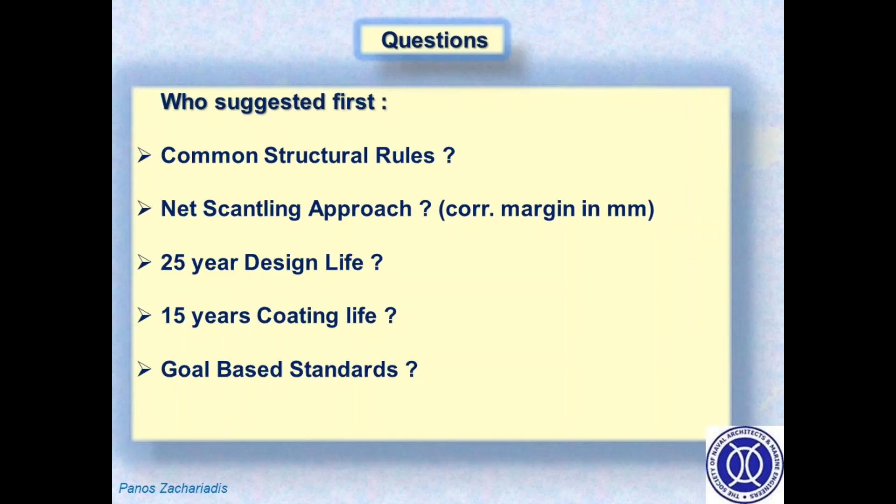So let's start with some questions. Who do you think suggested first common structural rules, net scantling approach, 25-year design life, 15 years coating life, or goal-based standards? The answer may surprise a few people. Even common structural rules were suggested by Greece.

So a short history on goal-based standards and how they started. Most people say it started with the submission of Greece and Bahamas, but there is some prior history. The reason that they started is because of deteriorating construction standards, classes competing on scantlings, which classes have admitted. They have accepted that this was a problem.

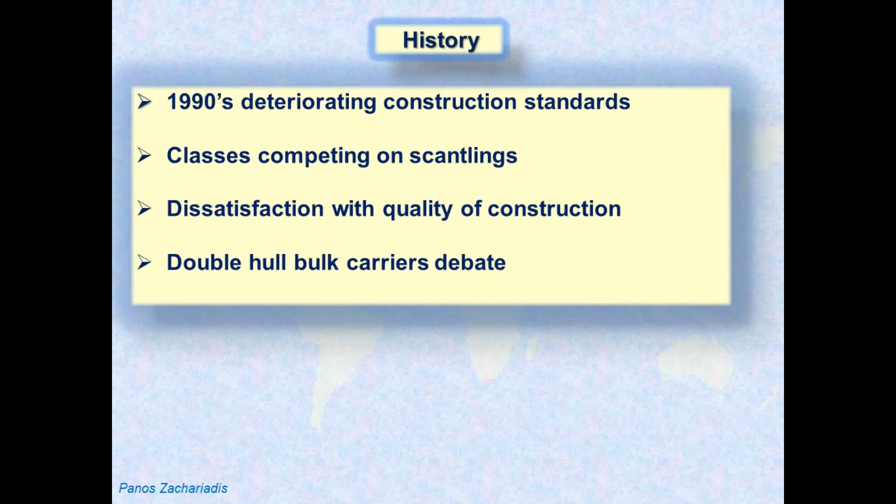Dissatisfaction with quality of construction, and there was the double hull bulk carriers debate, where at the same time there were some assessments made that double hull bulk carriers may be safer than single hull bulk carriers. And of course the Greek reaction was, this is not so. The problem is the rules and the quality of construction. So that played into the startup of goal-based standards.

So this is the paper that actually started everything. This is a paper by Greece titled Building of Robust Ships. It presents the view that IMO should ensure the building of robust bulk carriers and tankers and suggests actions to pursue. It mentions that the IMO regulates everything that has to do with the operation of the ship, but doesn't really care about the design and construction of ships.

It has some pretty harsh words. The classification society, although chosen by the owner, is paid by the shipyard, and this poses a situation of potential conflict of interest. Competition for new building orders makes it imperative to have unified standards on all aspects of ship design and construction. So this is the first motion for common rules.

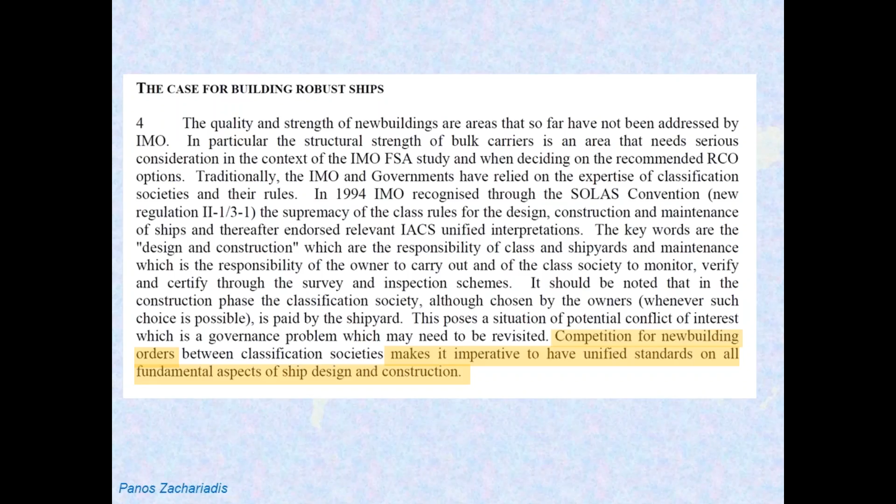The general trend in shipbuilding is optimization, which really means minimization, and that was a submission to MSC, the Maritime Safety Committee. The Maritime Safety Committee replied that IMO doesn't deal with construction standards. This is the prerogative of administrations and classification societies.

But at that time, Greece found an ally, Bahamas, and together they made a submission to the Council of IMO, which is the ruling body, suggesting that it's about time that IMO should play a role in the construction and design of ships.

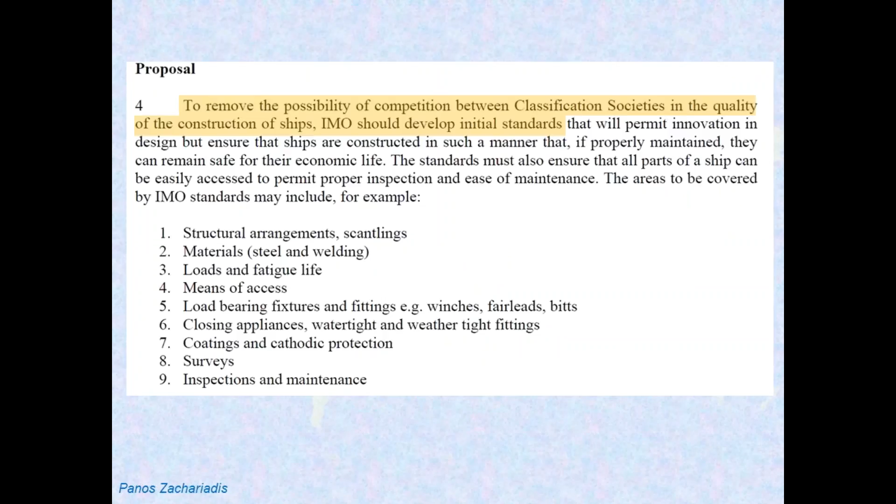And in that submission to the Council of IMO, it suggests which areas IMO should specify for the construction of ships and get involved in. It suggests that IACS should develop and implement unified standards. Coating standards should have a 15-year expected life. This is long before PSPC.

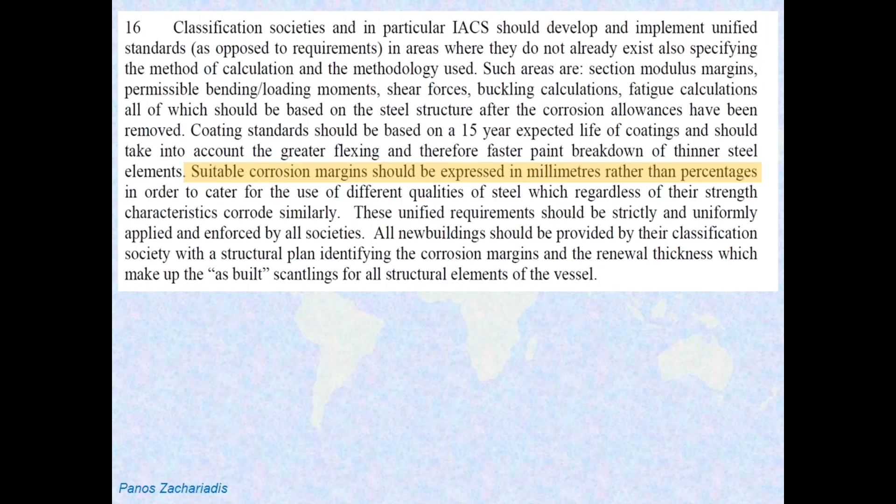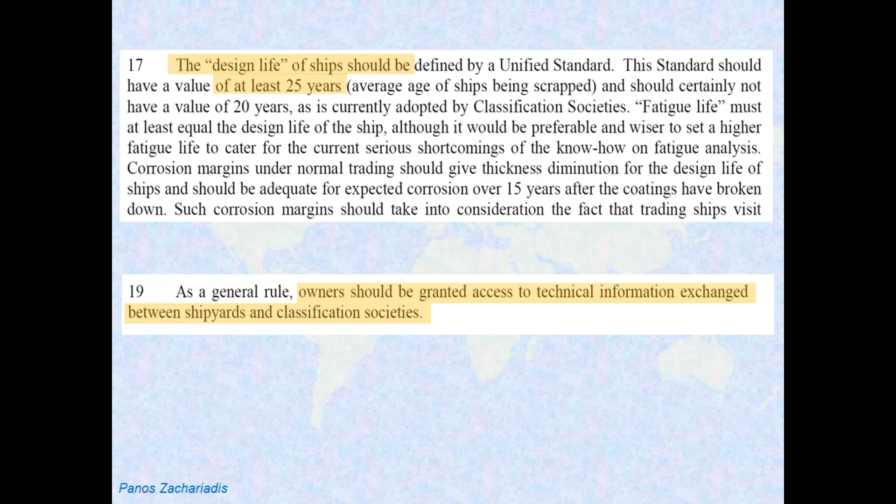And that suitable corrosion margins should be expressed in millimeters rather than percentages, the net scantling approach. The design life should be 25 years. Owners should be granted access to technical exchange between shipyards and classification societies. Of course, the Council finally agreed to it and sent it back to MSC, and they said, yes, we agree to it. IMO should be involved in the construction of ships and the rules, and therefore back to MSC, so MSC can now fix the details of this new item.

And of course, like I say, if you can't beat them, join them. IACS came along. Of course, for something like that, whether you like it or not, you need IACS. You need the expertise of IACS if you're going to make the rules for rules. And of course, IACS also liked to be involved, so they can influence the outcome. So the attitude until that point was, don't get involved in our regulations. Tell us what you want to do, tell us what your goal is, and let us do it because we know best. Well, now IMO gets involved.

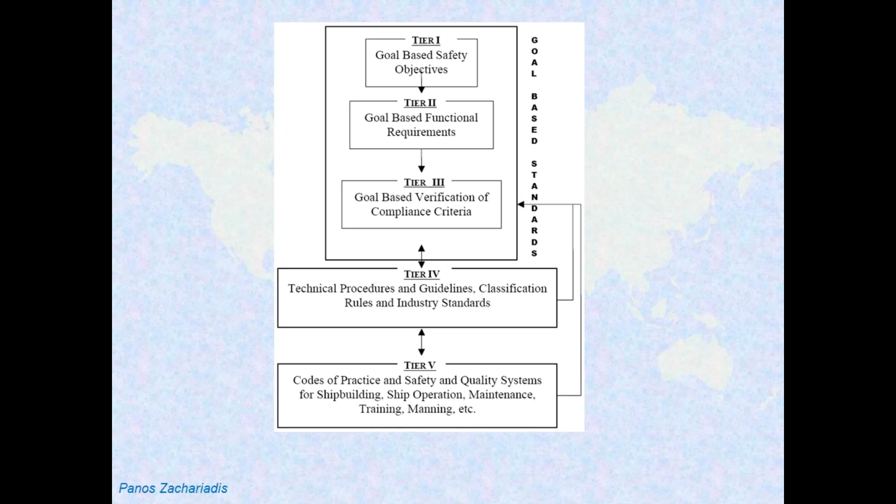And in that proposal, this is the familiar goal-based standards 5-tier diagram. The first 3 tiers are the prerogative of IMO. Tier 4 is the actual rules of classification societies. Tier 5 is non-mandatory guidelines and so on. So MSC obviously develops a working group and sends the issue to the working group to deal with the details. And soon the first problem started.

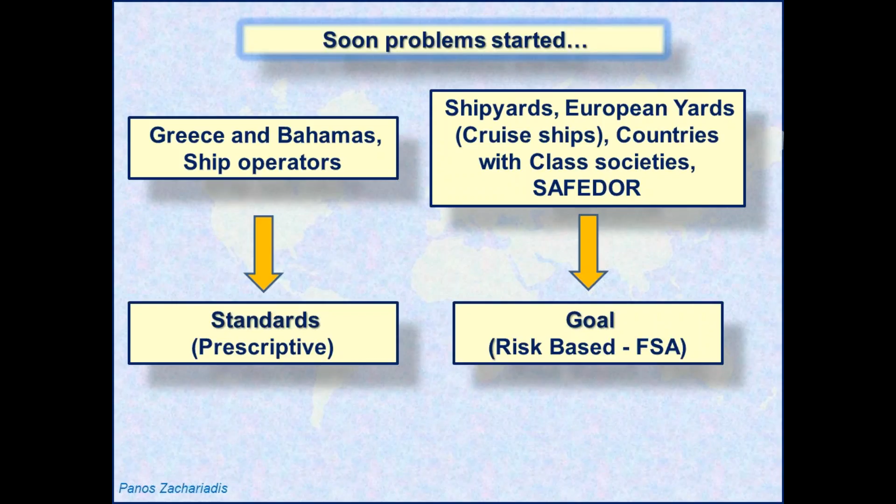Greece, Bahamas, and the ship operators in general, from the goal-based standards, had in mind the standards part of the word. They wanted prescriptive, strict regulations. Shipyards, the European shipyards who deal with cruise ships, like flexibility, innovation, and so on. IACS and SAFEDOR, which was a big consortium of European countries dealing with risk issues and risk design, had mostly in mind the goal part of the phrase. In other words, that goal-based standards should be based on a safety level approach, FSA, formal safety assessment.

So this debate went on for 2 years, and IMO was pretty much stuck until finally it was decided that both will proceed, both the risk-based approach and Greece's prescriptive approach. The prescriptive approach will be applicable only to tankers and bulk carriers for the time being. And of course, the safety level approach needed a lot more time in order to be finalized. So it was something for the future anyway.

Now, on the prescriptive approach, soon enough, 2 versions of Tier 2, of functional requirements that need to be complied with by the rules, were created. One was the Greek version, the other one was the Japanese version. Now, as we understand, the Greek version was very prescriptive, very strict. We tried to include everything that we need the rules to comply with. The Japanese version was milder. Obviously, they wanted less regulation, more flexibility for them.

So that took up another good 1.5 years or maybe more until somebody had an idea to convince Spain to produce a compromise version. Now, Spain produced a compromise version of Tier 2, and I think this had a big role to play because Spain, because of the Prestige, in a way was for stricter rules. So the end result, I can say I liked, because the Spanish version was much closer to the Greek version than the Japanese version.

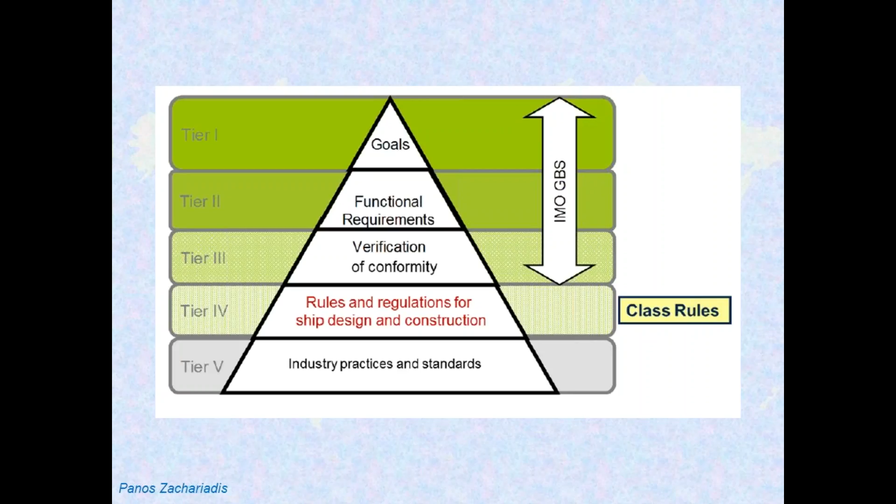But for me, the heart of goal-based standards is the verification of conformity, because in there you have all the details of what exactly the rules should include in order to comply with Tier 2 and Tier 1. This is the functional requirements finally that were set up for Tier 2, 15 functional requirements. Design life, what the design life of the ship should be, what environmental conditions should be used for the design, and so on.

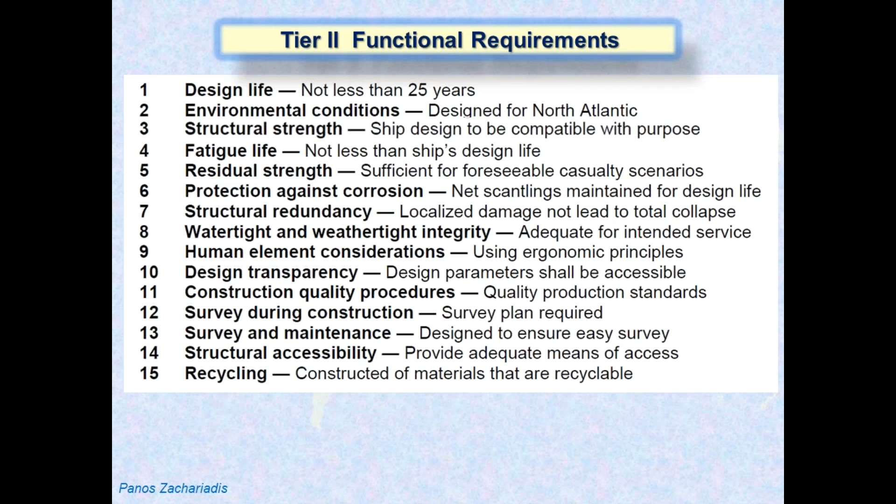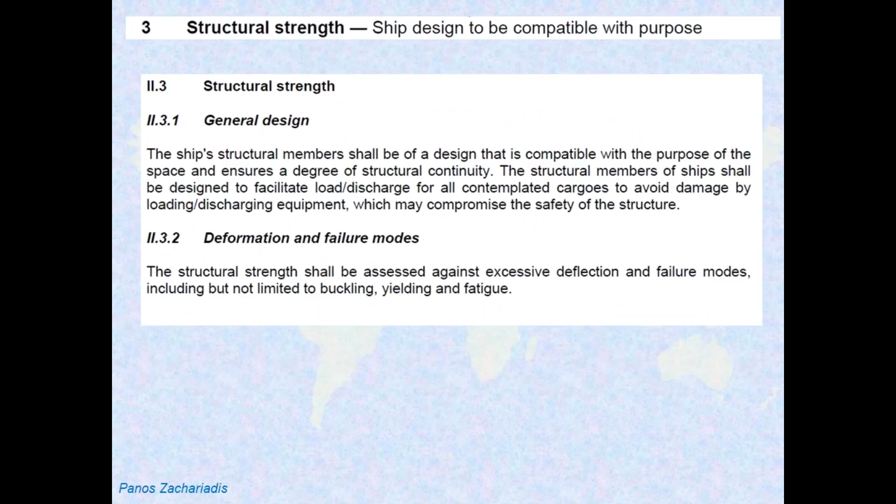Let's take an example of structural strength. This is the actual text of Tier 2 for structural strength, the general paragraph, and then it goes on to say that the structural strength shall be assessed against excessive deflection and failure modes, including buckling, yielding, and fatigue, and it should take into account ultimate strength, and it should have sufficient safety margins. That's all there is to it as far as structural strength for Tier 2.

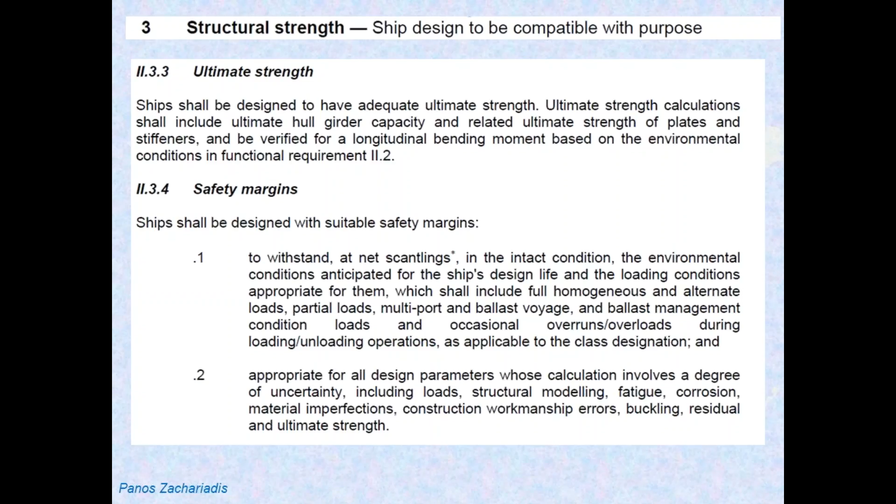The verification part, however, the Tier 3, is much more detailed. It requests from the authors of the rules to produce to the auditors of IMO, so they can verify whether the rules comply with the standards, 2 things: documents and information, and evaluation criteria. The documents look something like this: information and documentation requirements.

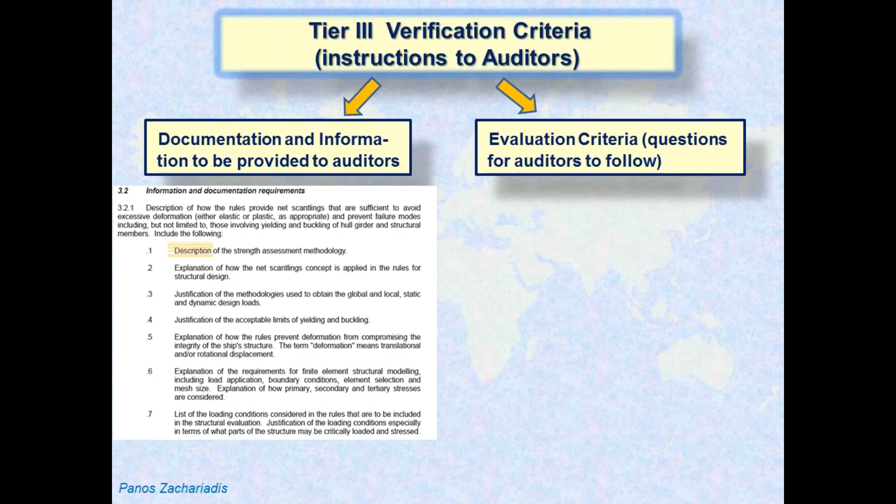Give us the description of how you do the strength assessment. Give us an explanation of the net scantling concept you are using. Give us justification of the methodologies you use to obtain the global loads and all that. So this is information that the auditors request from the classification rules. By the way, 25 such items are required in Tier 3 only for the structural strength.

Once they get the information, then Tier 3 guides the auditors on how to do the audit. And it tells them, you have to ask yourself the following questions. If the answer is yes, it's okay. If the answer is no, it's a problem.

So, for the structural strength, do the rules specify the probability of exceedance for which global and local dynamic loads are calculated? Are the limits of yielding and so on set at levels that will maintain the structural integrity? Do the rules sufficiently contain information and so on? Questions for the auditors to answer during the audit. 23 specific and detailed questions for the structural strength.

Now, you can imagine, this is one item. We have 15 Tier 2 functional requirements. This is just an example I'm giving for structural strength. Each one of them has such detailed requirements for information to be provided and documentation and specific evaluation criteria.

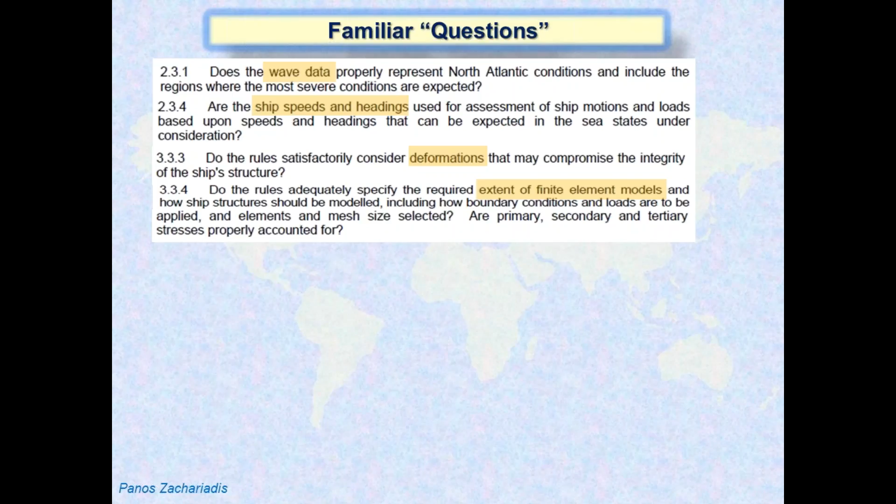So, some familiar questions, questions that I picked up as examples that are included in the evaluation criteria of Tier 3. Does the wave data properly represent the North Atlantic? Do the rules satisfactorily consider deformations? What is the extent of finite element models? You see how detailed the questions are.

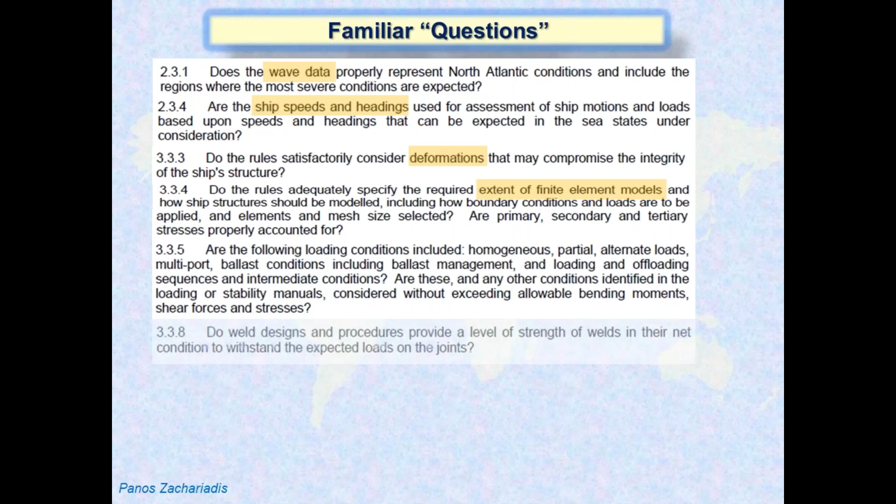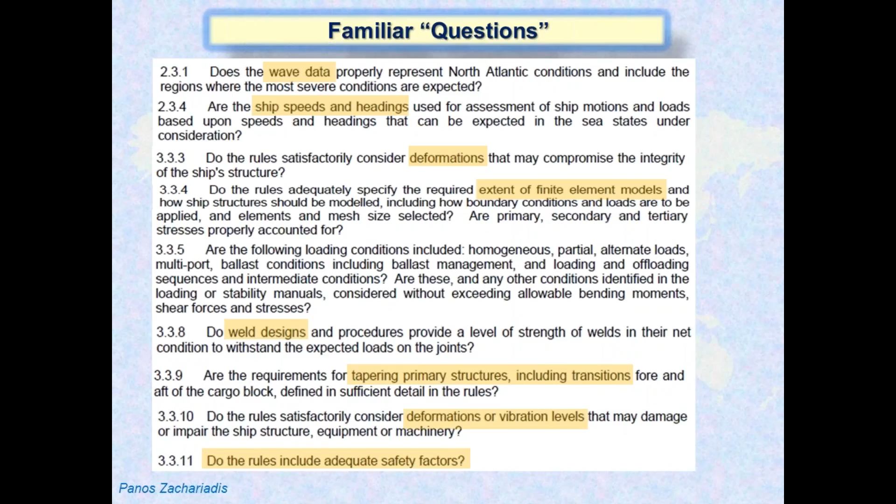Are the following loading conditions included? Homogeneous, partial, alternate, multi-port, ballast, ballast management, loading and offloading sequences, and intermediate conditions. All those are requirements for the rules to include and comply. Weld considerations, tapering, transitions, deformation, vibrations. Do the rules include adequate safety factors? If you use stress concentration factors, how did you come up with them? Okay, I'll go a little fast, but you can see the level of detail Tier 3 goes into.

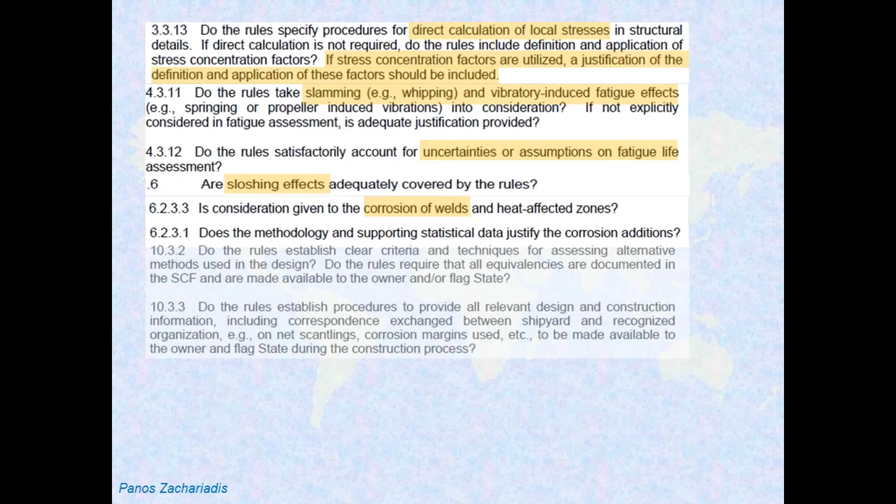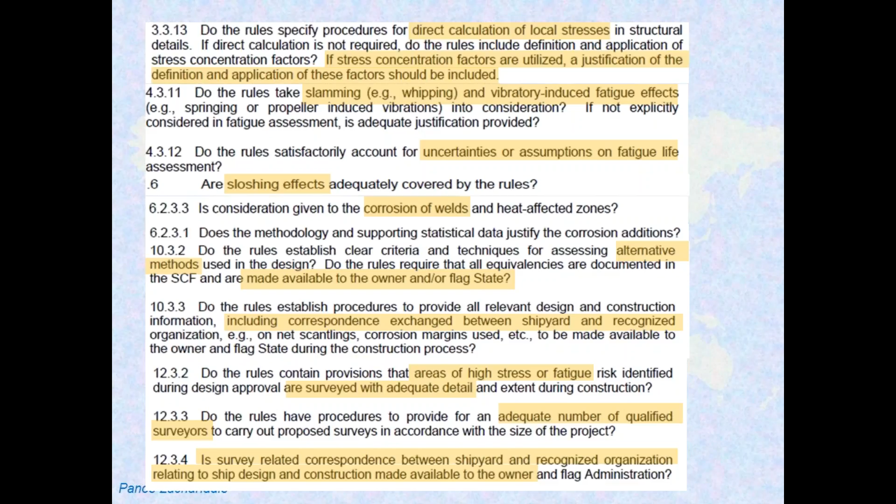And of course, most of these were developed during the pilot project. I didn't take part, but there were some people who were part of the pilot group, Mr. Andreopoulos and other experts, actually not from classification societies. Classification societies were on the other part, professors from universities and all that. And they did a real good job in actually coming up with good criteria for rules.

So that was the goal-based standards part. This is what the goal-based standards are. And now we go into the common structural rules. This is the latest version, harmonized for tankers and bulk carriers. These are the rules that were submitted to IMO so they can go through the audit to decide whether the rules comply with all the standards or not.

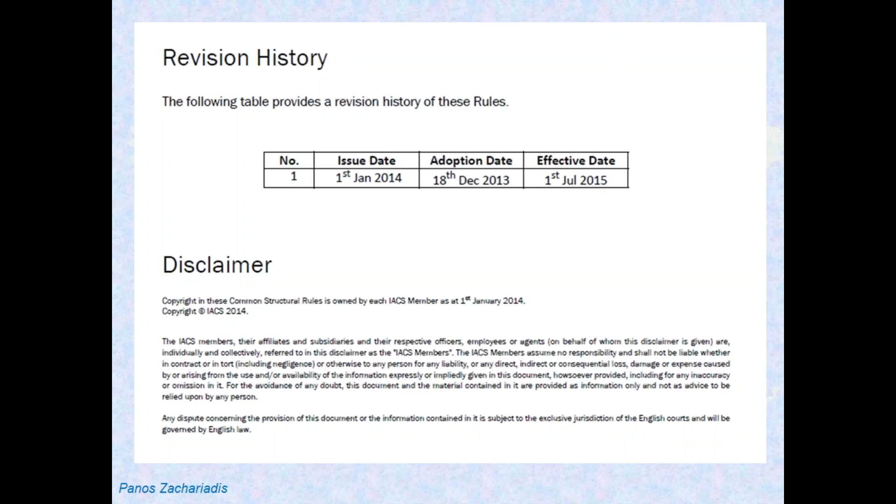The rule, of course, is thousands of pages if you include the URs and the UIs and all that. And this is the first page of the rules. The first page of the rules has a disclaimer and says, IACS members assume no responsibility and shall not be liable for anything arising from the use of this information. For the avoidance of any doubt, this document and the material contained in it are provided as information only and not as advice to be relied upon by any person. Now, this is on the rule book.

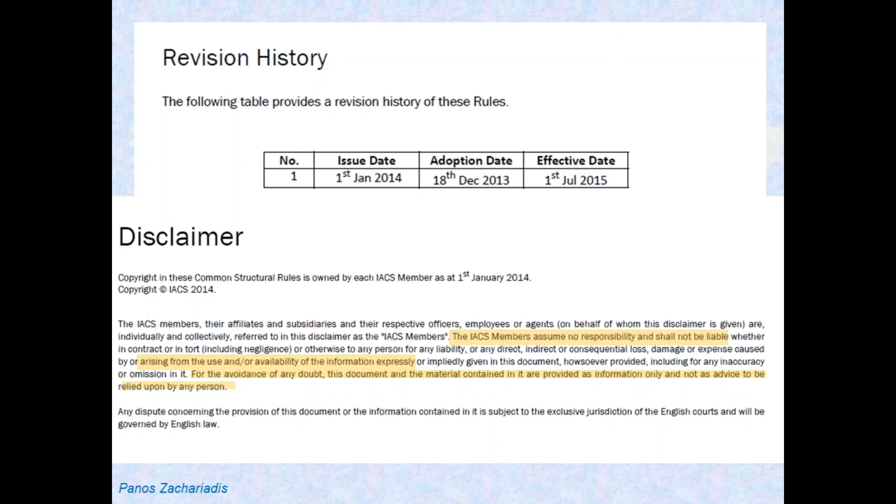Now, on the IACS site, it's a little different. It says, unless that person has signed a contract with the relevant IACS member, and then the liability would be as per terms of that contract. Now, of course, owners don't sign contracts for the construction of the ship. Shipyards do. I don't know if shipyards involve any responsibility. I would doubt it. But this is an issue that never stood well with me. You give rules, you build ships, and then you have this kind of disclaimers.

So IACS submitted two big packages, Common Package 1 and Common Package 2, which one is the CSR harmonized rules, and the other one is all the related documents that IACS uses in conjunction with the rules, unified requirements, procedural requirements, unified interpretations, etc. And also every classification society has its own rules that are not already covered by the other two documents. And all that was submitted to IMO for audit.

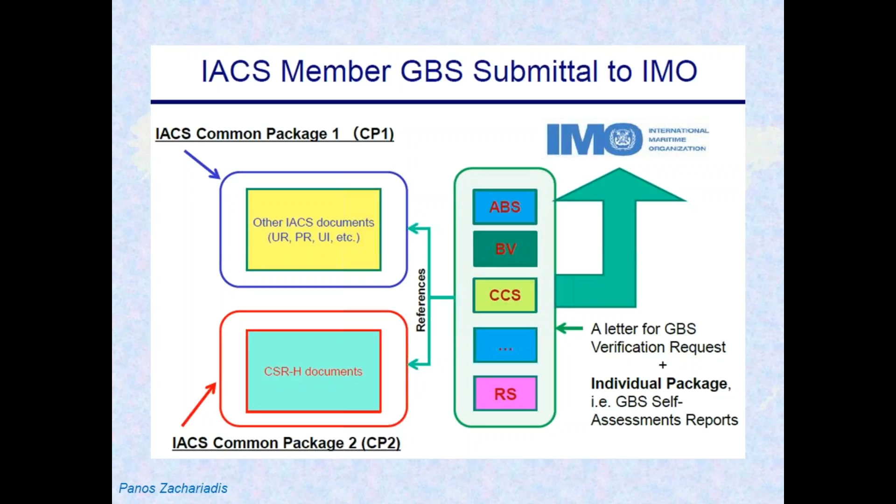And IMO produced 5 teams of auditors, 17 auditors in total. But the bulk of the work, of course, was Team 1 and Team 5. Those were the 2 teams that actually checked the common structural rules, the harmonized version. Teams 2, 3, and 4 checked only the individual rules. In other words, the areas in each IACS member's rules that are not already included in the common packages.

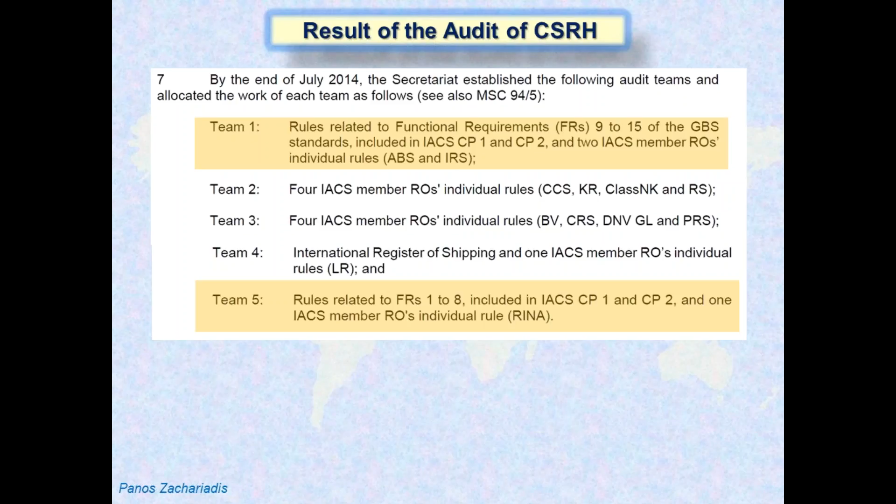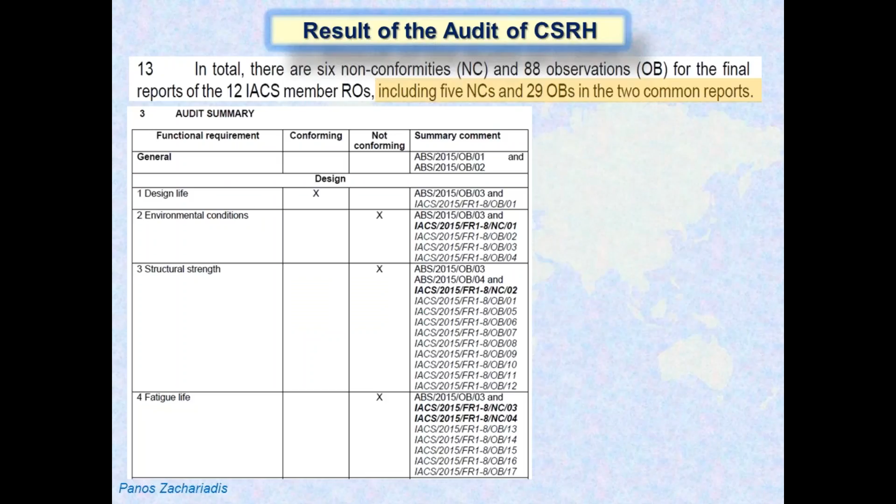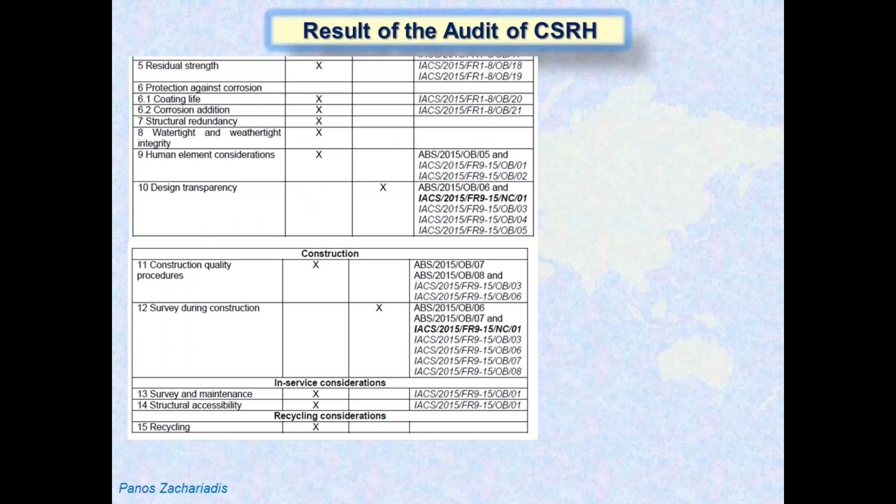This is a summary of the result of the audit. As you can see, not conforming was environmental conditions, structural strength, fatigue life, because except for many observations that were produced by the auditors, for these areas there were also clear non-conformities. Also design transparency was a problem, and survey during construction was a problem. And we'll go into more detail into that. That's an example of how the findings by the auditors look like.

This is the first non-conformity, it has to do with IACS Recommendation 34, which is the North Atlantic wave data that IACS uses for the design of ships. In there, IACS assumes equal heading probability for the ships, no matter what the weather and the waves. And of course, this was found to be a non-conformity because, as we know, head seas always should have higher probability of occurrence because the masters, even in bad weather, prefer to have the bad weather at the bow.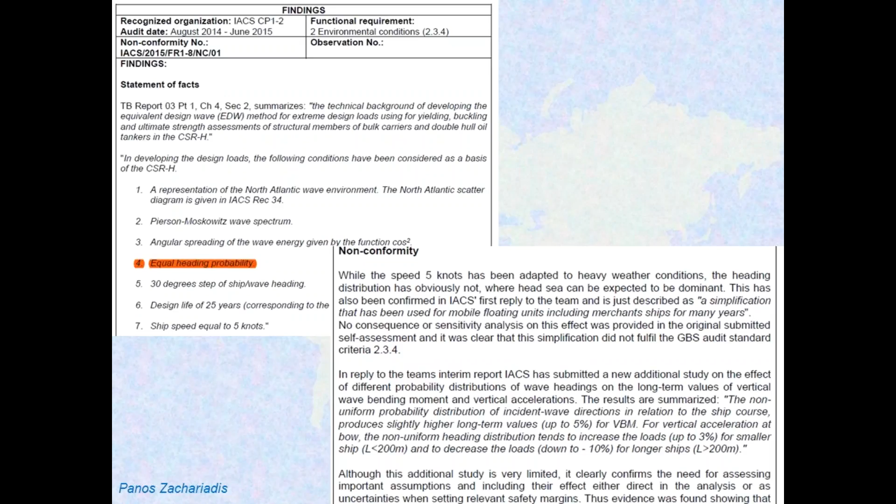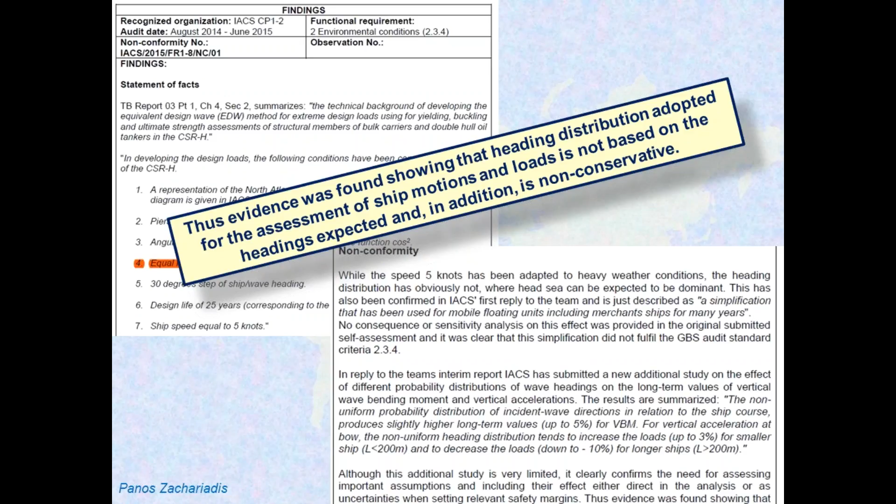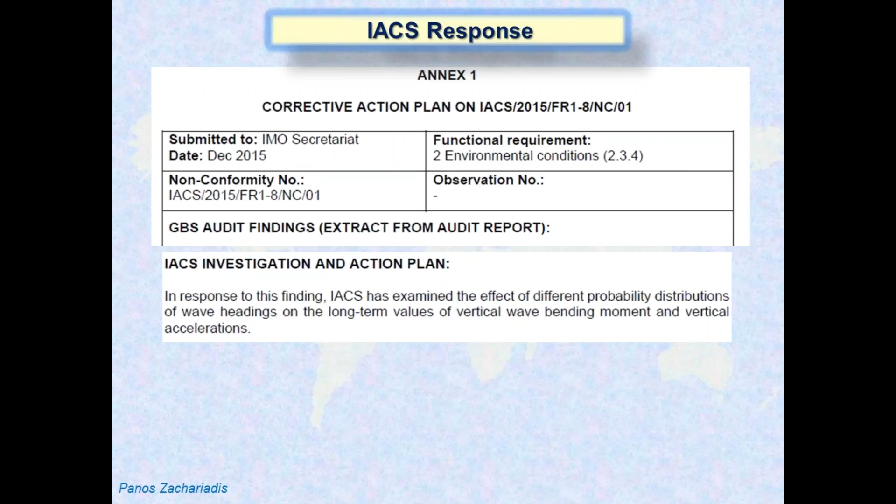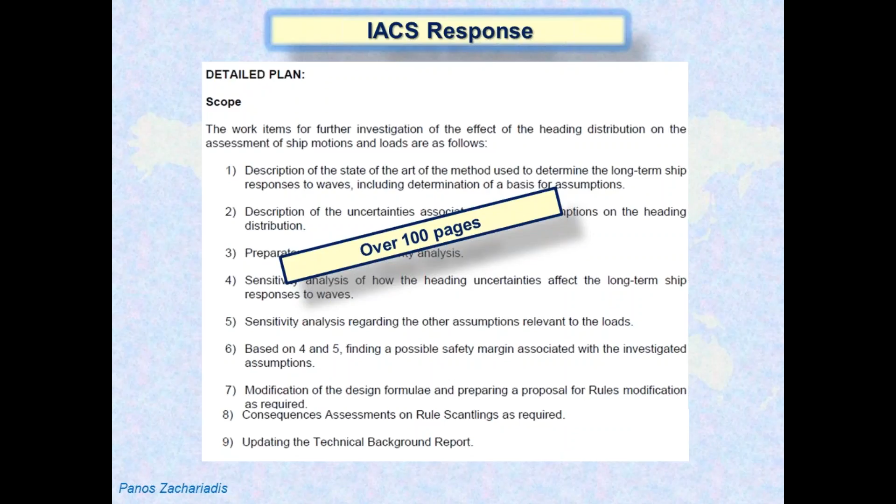So this is the conclusion from the auditors. Evidence was found showing that the heading distribution adopted for the assessment of ship motions and loads is not based on the headings expected, and in addition, is not conservative. To these findings, IACS makes a response by proposing corrective actions. This is how it looks in this specific case. IACS says, I'm going to do 1, 2, 3, 4, 5, 6 in order to comply with this non-conformity. The IACS document, as a response to the auditor's findings, is over 100 pages.

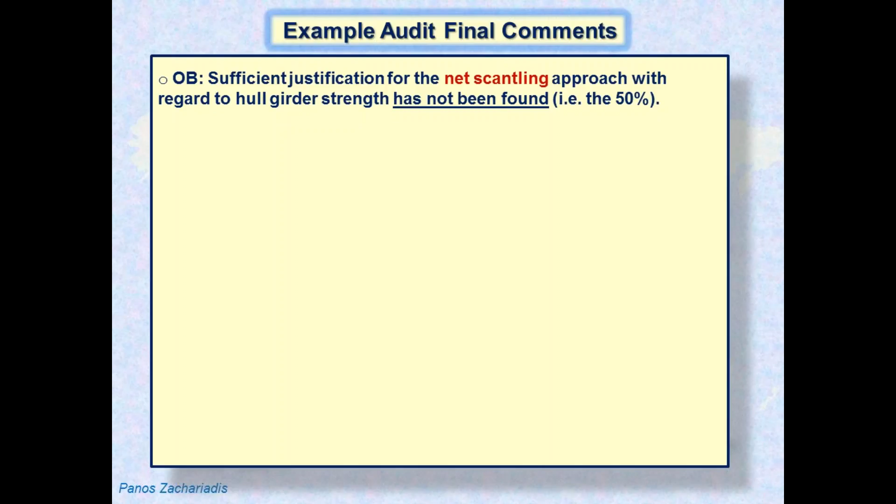I want to give you now some example audit comments. Observation: sufficient justification for the net scantling approach has not been found. In other words, how did you come up with a 50% corrosion addition to the net scantlings? The audit has not found sufficient justification that the wave data used in the rules properly represent the North Atlantic. We all know it's old data. There are a lot of new studies saying it's more severe and all that.

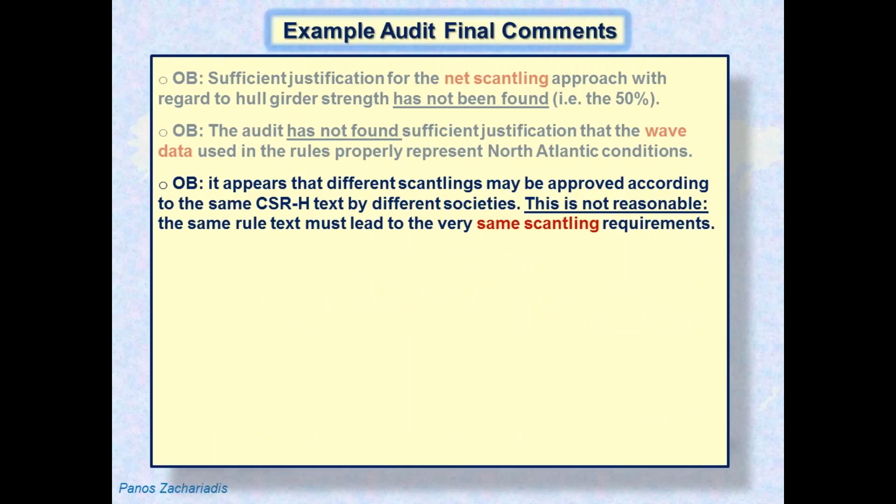Different scantlings will be produced by the same rules. This is something, of course, we've been saying a long time ago, and that's because of the software. If you don't have common software, you're not going to get the same scantlings. Notice that so far all these are simple observations. Okay? They are not non-conformities, but to me, most of the observations were actually non-conformities.

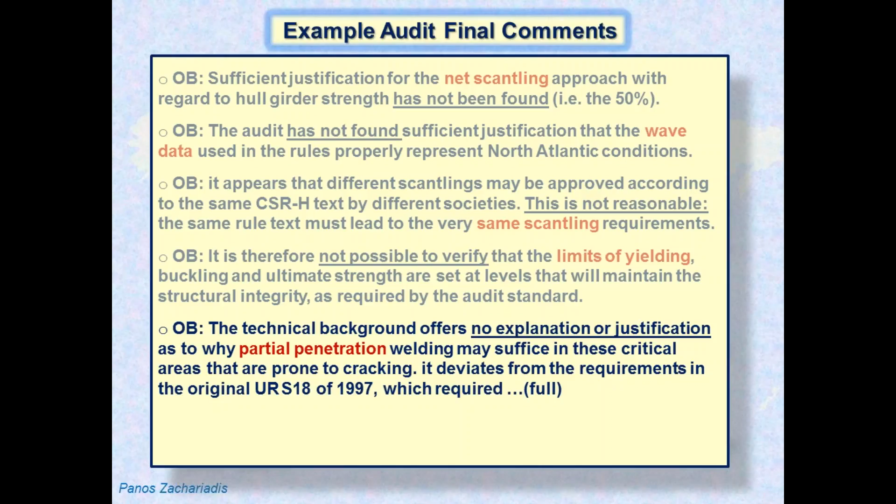Not possible to verify that the limits of yielding, buckling, and all that are set at appropriate levels. The technical background offers no explanation as to why partial penetration welding may suffice in these critical areas. Something that we've also been saying at the UTS time and time again. This is a non-conformity: there's no evidence to conclude that the rules include adequate safety factors.

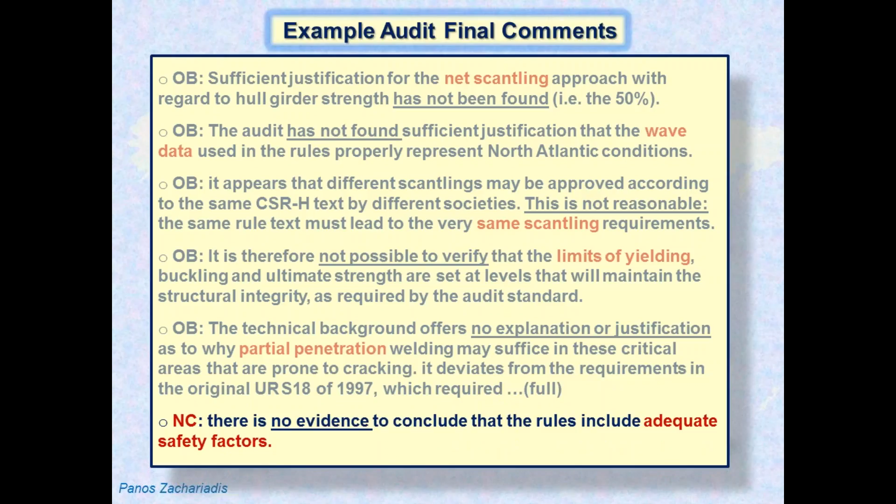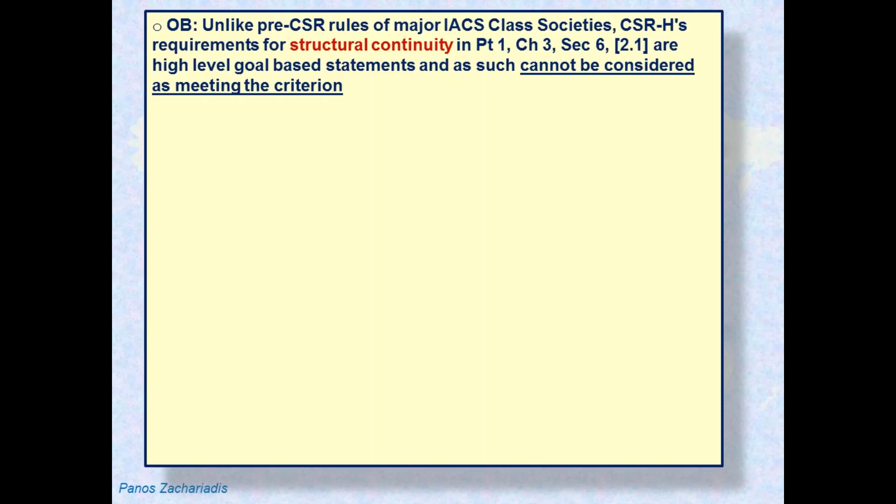Sounds serious, I guess. That's another little embarrassing statement, I would think, for IACS. It says, unlike pre-CSR rules, in other words, the pre-CSR rules have it, requirements for structural continuity are in these rules high-level goal-based statements and cannot be considered as meeting the criteria. In other words, clearly the auditors think this is a downgrade of these rules.

As far as the safety margins, many times IACS has claimed that designing for North Atlantic conditions is safety margin enough, because not all ships, and mostly existing ships, don't always operate in the North Atlantic. And of course, this is something that I don't agree with, and the auditors don't agree with. Goal-based standards say we design for North Atlantic, period, and also they make ships that are always operating in the North Atlantic, so they have to be safe too.

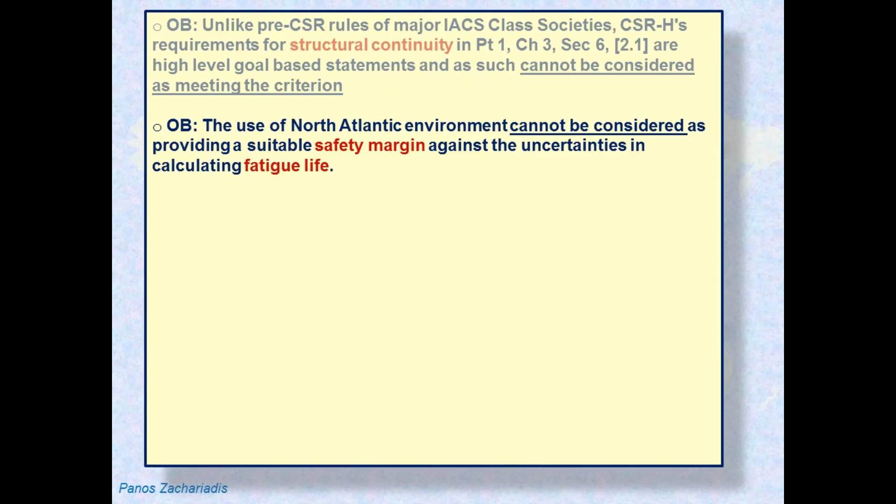The assumed loading conditions, this is for fatigue, appear unrepresentative. IACS assumed that the ship is loaded 70% of the time, 15% of the time is in heavy ballast condition, and 15% of the time is in light ballast condition. And of course, the auditors said the North Atlantic will never operate in light ballast condition. So heavy ballast being, as John Botarakis well knows, the most punitive fatigue condition, it was pretty much reduced by considering that half of the time in ballast condition would be light ballast condition. And that's a non-conformity, by the way.

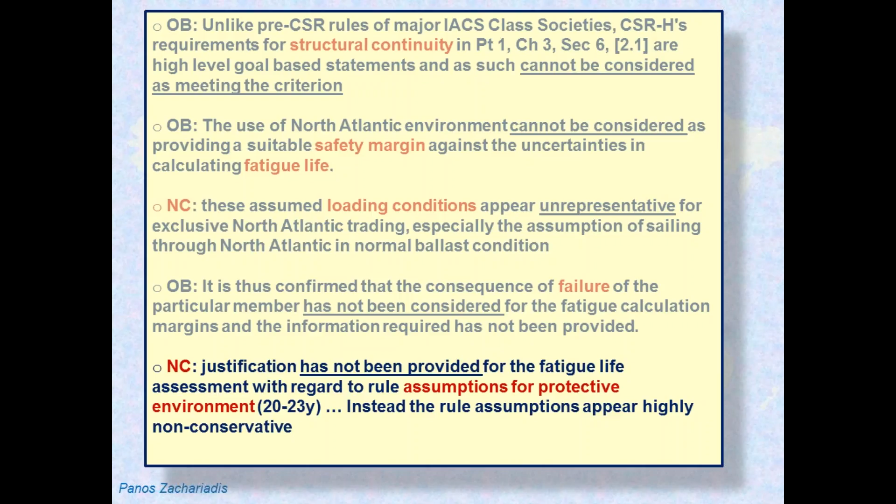The consequence of failure of a particular member has not been considered in the fatigue calculation. Non-conformity, no justification with regard to the rule assumptions for protective environment. This is again for fatigue. In fatigue assessment, IACS and the rules assume that the steel is protected for 20 to 23 years. In other words, it remains coated. And we're talking about welds and all that. As you understand, without maintenance and repairs, this is not possible. And we're talking also about void spaces where PSPC is not valid to begin with. So this is clearly a non-conformity and an unrealistic assumption that, according to the auditor, needs to be revised.

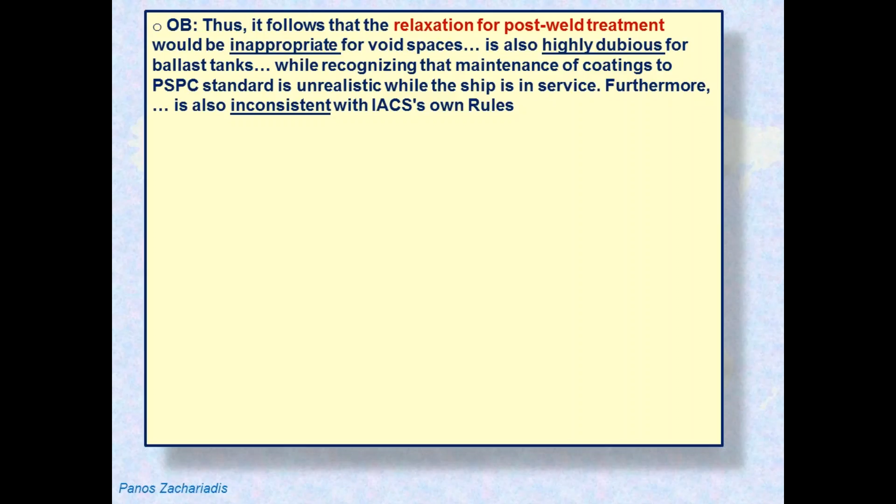Post-weld treatment, another hot potato. If you do grinding, you can reduce the required fatigue life of a detail. In other words, you can assume that 17 years of fatigue is equivalent to 25 years as the rule requires if you do grinding. And of course, again, this may be inside tanks, inside void spaces, and so on. And we know the reality of ships, this is not really possible. So the auditors ask that this is taken back.

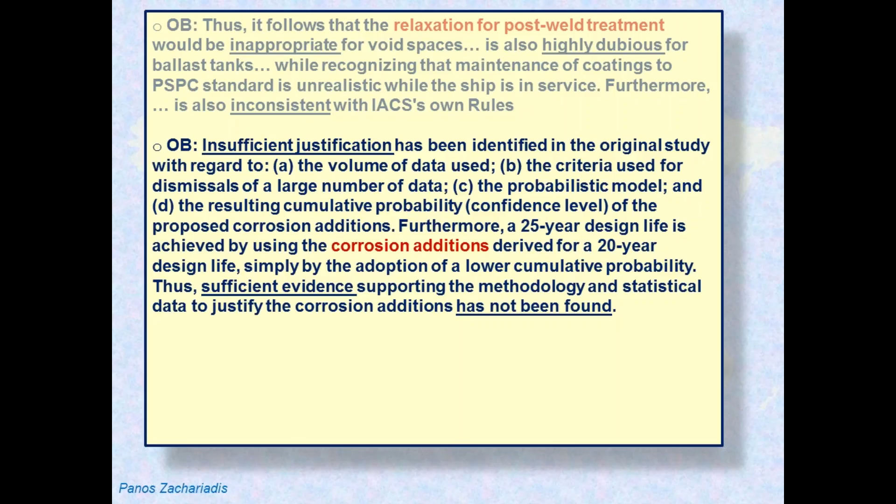Corrosion additions, my favorite subject. Practically, the auditors question the whole methodology of the IACS method of producing the corrosion additions. They say insufficient justification for the volume of data, criteria used, the probabilistic model, cumulative probability, and so on. Not enough evidence that alternative methods to the rule are assessed properly.

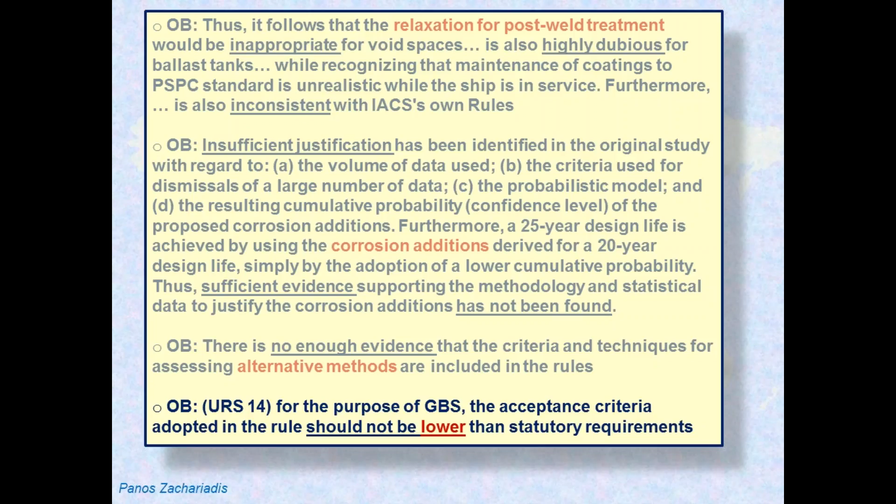And finally, another hot issue lately, UR S14, this is the testing of tanks of watertight spaces. IACS was using a version of UR S14 that's not in accordance with SOLAS. And here, the auditors reprimand IACS saying you should never use anything lower than SOLAS in your rules.

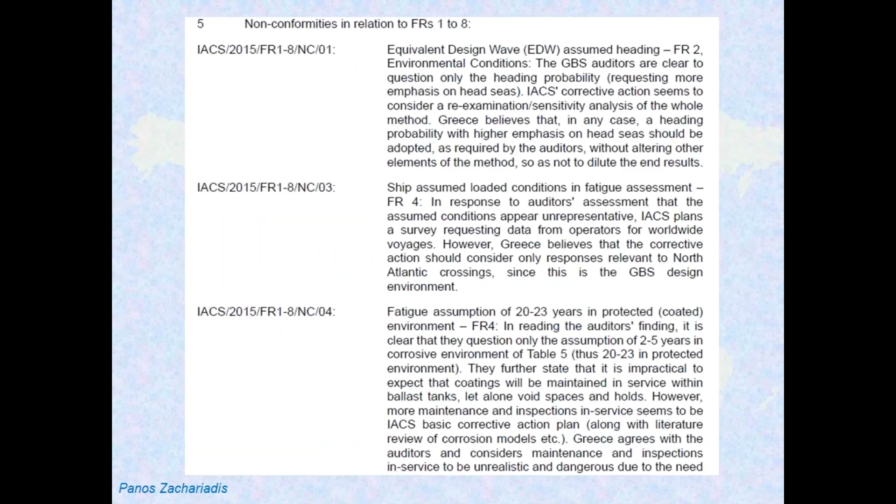So far we have the audit report, the reply by IACS on how they plan their corrective actions, how they plan to proceed. And only Greece submitted some comments to this MSC that's coming up in May, saying in general that we agree with the IACS proposed action plan, except for a few areas that we don't agree, and IACS should do it differently. This is a tabulation of really what Greece is commenting on. I don't know how much time we should spend. Let me see.

Let's take the first example that we discussed, the heading. The auditors say change the heading probability and make it so that head seas have higher probability than anything else in your assessment. In their corrective actions that IACS submitted to IMO, it seems that they propose to revise the whole method, not just the heading probability. So the Greek comment was, don't really address the whole method. Just change the heading probability and nothing else. Because by redoing the whole method, you can change the heading probability, but then you can change other things, so we don't know the net result.

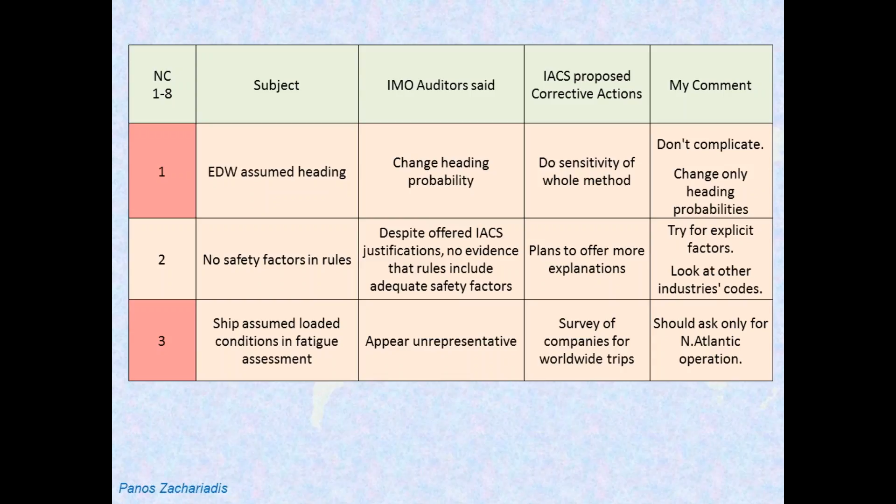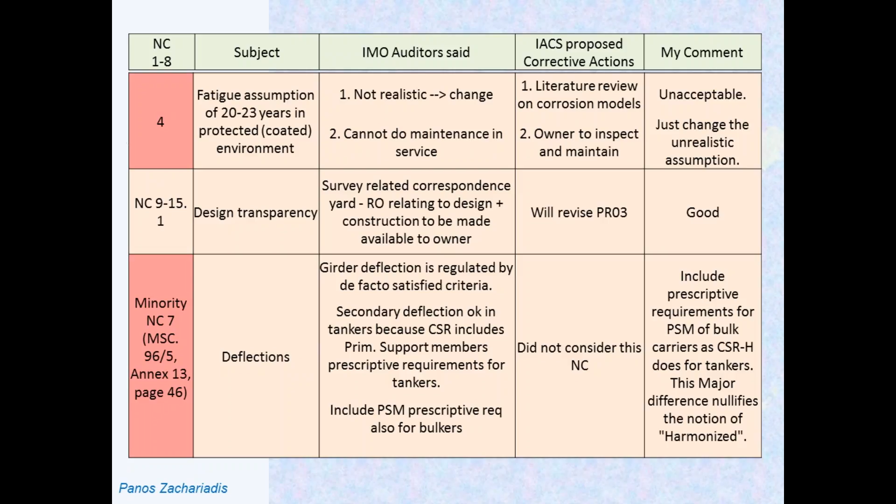So I'm sure you can see this later. The fatigue that we discussed before on the protected coated environment. And now we move to observations, full or partial penetration.

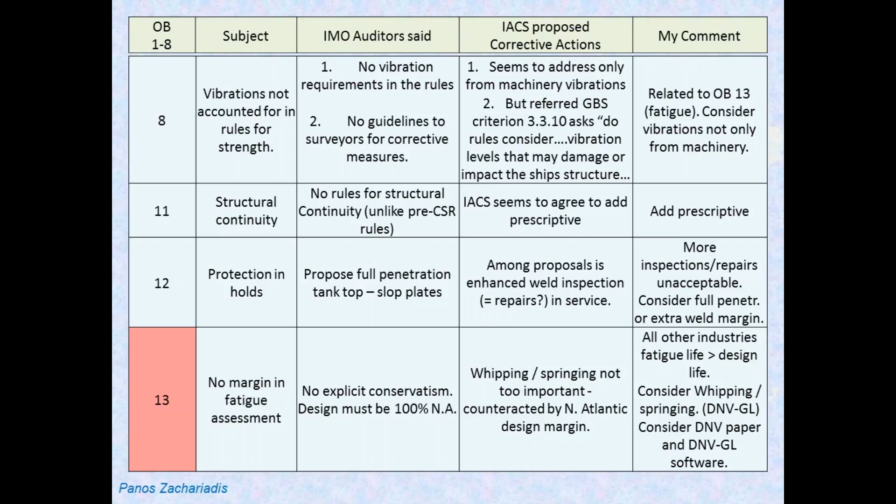No margin of fatigue assessment, and so on. If you want to revisit those in more detail, we can discuss it later.

In some areas, Greece did not agree with IACS for some good reason. For example, let's take the 17, fatigue ready for grinding. If the shipyard does grinding, then they can satisfy only 17 years of life for the detail. But this detail has to remain protected, coated for the life of the ship. So the auditor says, this is an unrealistic assumption, take it back. In other words, require 25 years of fatigue for all details.

In their corrective actions, IACS says, we will develop an inspection procedure for the ships in service. In other words, it seems to me, pass the buck to the operator. Instead of saying, forget about this relaxation in the construction rules, we'll keep it, and then we'll demand from the owner that every month or every 6 months, he goes into the void spaces and the ballast tanks to make sure that the welds are in code. Of course, as you understand, this is not feasible, and of course, it's unacceptable.

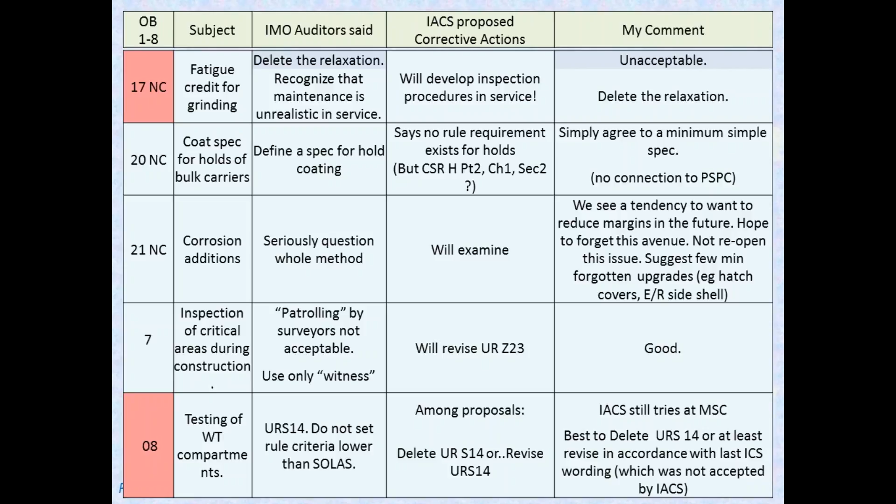So those were the interventions that are included in the Greek submission now to IMO. And hopefully there will be agreement not only by the other member states, but also by IACS to fix those things. Some conclusions. A lot of serious work has been done on goal-based standards to become a real good tool for the assessment of rules. The auditors did a very good job. They went deeply into the rules.

So, to me, the majority of the observations are actually non-conformities. In other words, you have the verification criterion that's clearly not satisfied, but then you only make an observation and not a non-conformity. But in any case, if all non-conformities and observations are properly addressed, the rules will be greatly improved. But of course, there are still quite a few things to fix in the rules. We should continue the effort.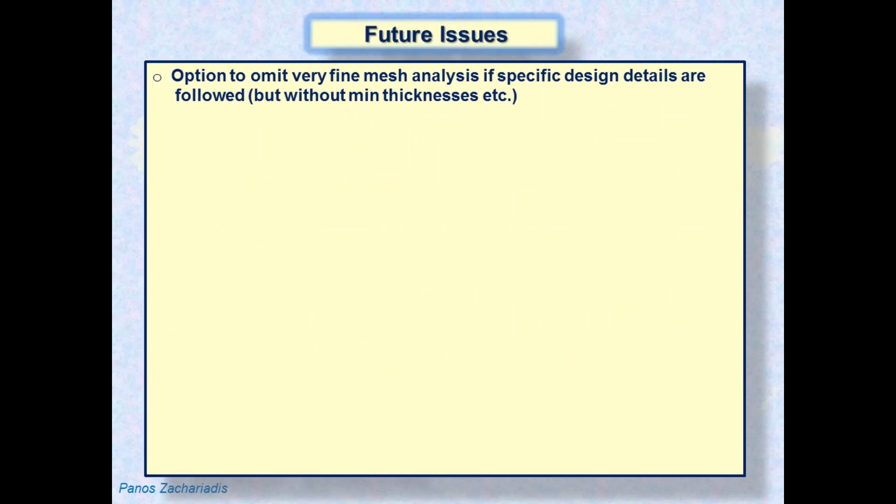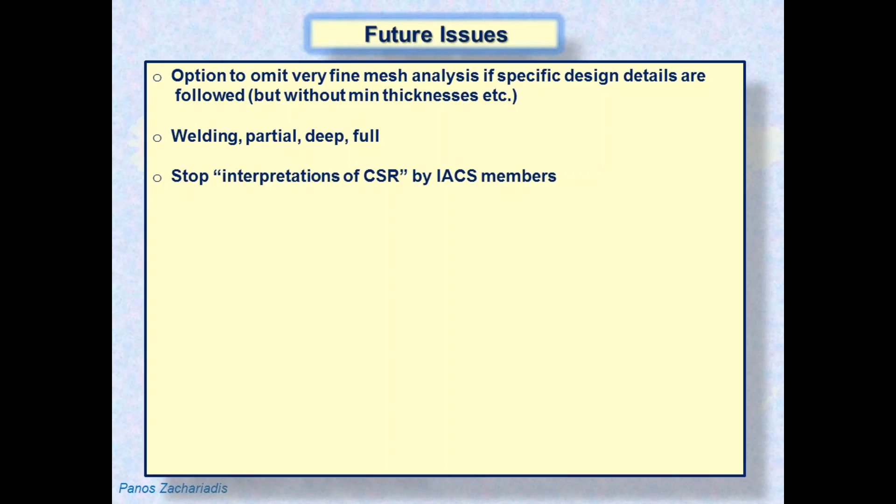Some of those things, perhaps: I don't like the fact that you can omit very fine mesh analysis if you use specific design details, because they are not prescriptive enough. It doesn't give the minimum thicknesses. Welding still needs work. Stop the interpretation of CSR by IACS members. Now, I have seen this before. I've seen a classification society that comes up with a paper and says, our interpretation of CSR is so and so. That shouldn't happen.

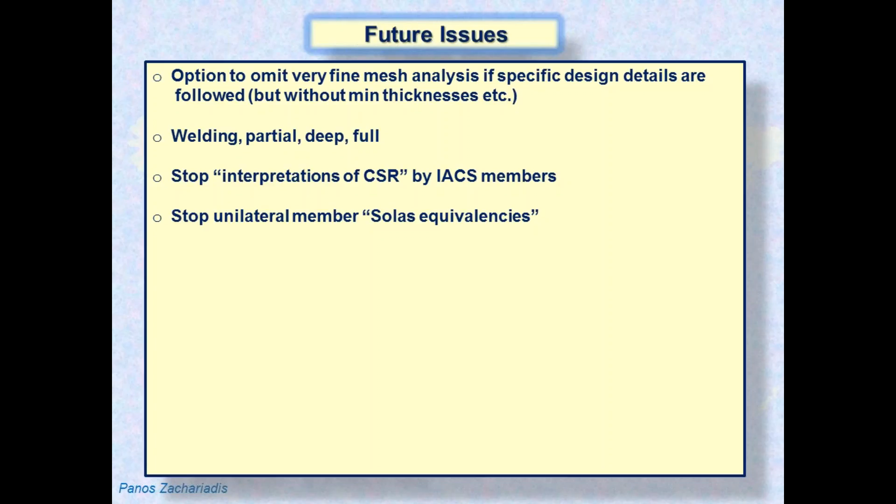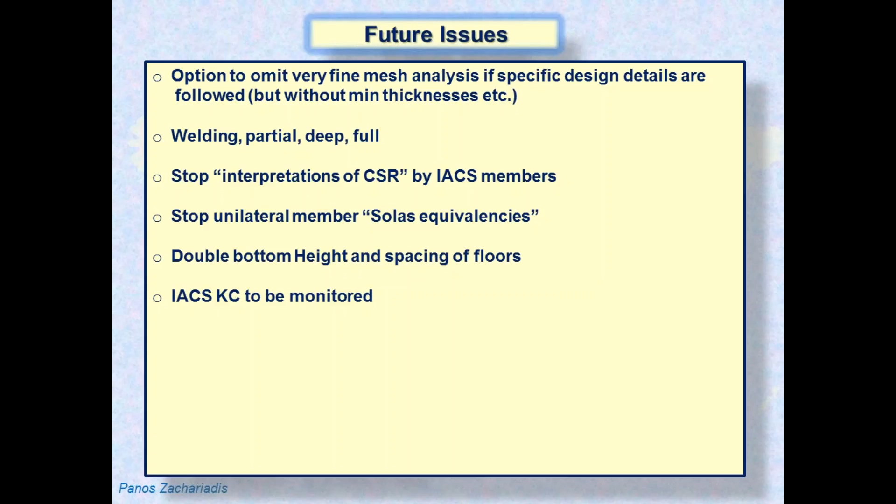Unilateral members, SOLAS equivalencies. One example, one called PSPC. This shouldn't exist. But they do it. They do it, yeah, but it's not legal. Double bottom height and spacing of floors needs work. IACS Knowledge Center needs to be monitored. I think IACS understands the problem we had before, that some of the answers in the Knowledge Center were actually rule changes. So I think now there's better control.

Whipping, URS 11, there are studies, notably I would say by DNV, that whipping and springing contributes an order of magnitude to the fatigue of bulk carriers and tankers. And yet, the issue, I have the paper. I'll send it to you.

Only the big guys? Only the big guys. Long vessels, long high-length vessels. Okay. I don't remember if it was for bulk carriers and tankers, that paper specifically, but I don't remember how big. Appreciate it. You give me a call. Yeah.

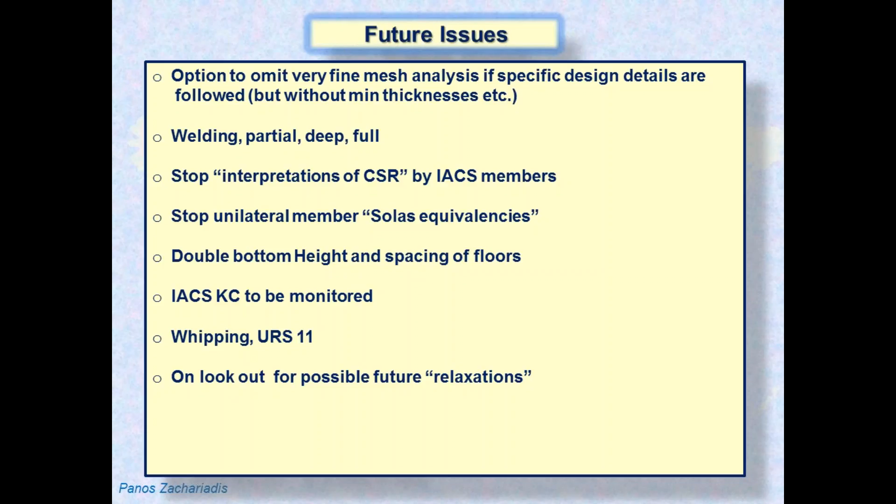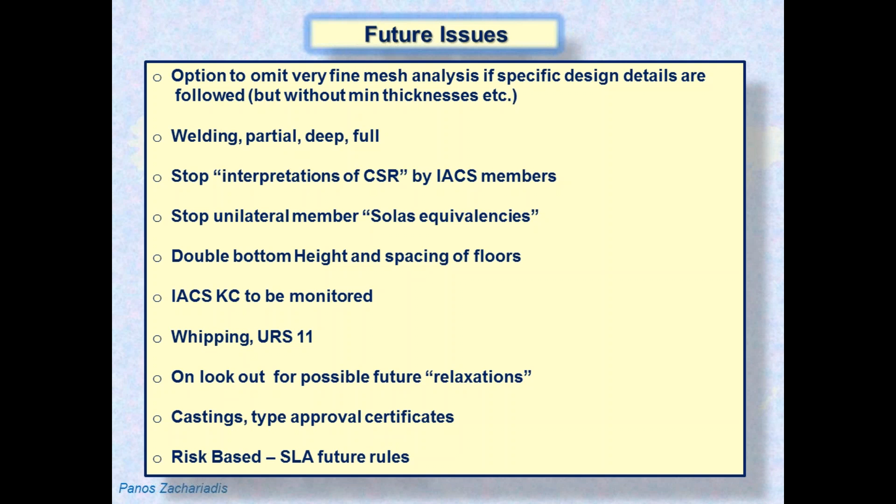Of course, stay on the lookout for possible future relaxation. Shipyards are the instigators of this. They say this is not required, this is not needed, and so on. And before you know it, there are changes in the rules. Castings and type approval certificates, big issue. And of course, longer term, we need to keep an eye on the safety level approach because it has the potential of throwing every prescriptive item in the rules into the garbage bin. So we need to go carefully into the safety level approach.

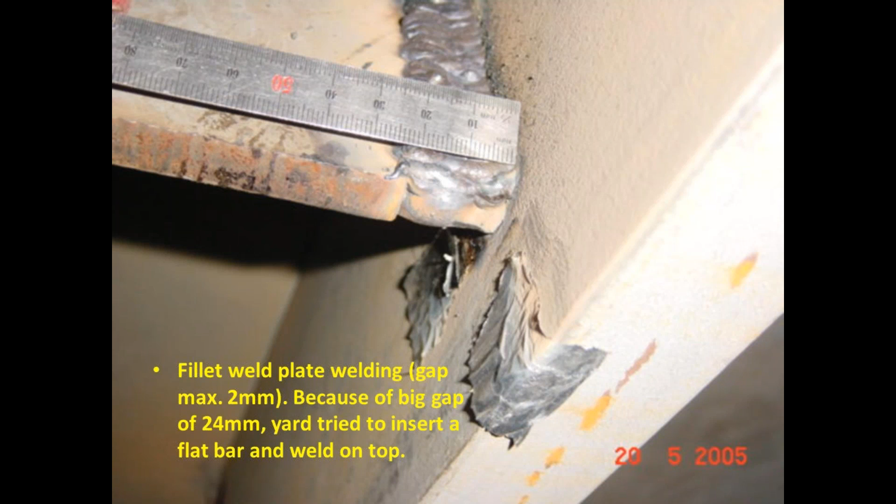So what's the reason for all this? The reason is to avoid these kinds of situations. This is from the construction, and you see you have a big gap. The shipyard put a piece of steel. No, they don't do that in the shipyard. They started welding over it. Some nice pictures for you. Misalignment of blocks. If not seen by somebody, they would weld it like this.

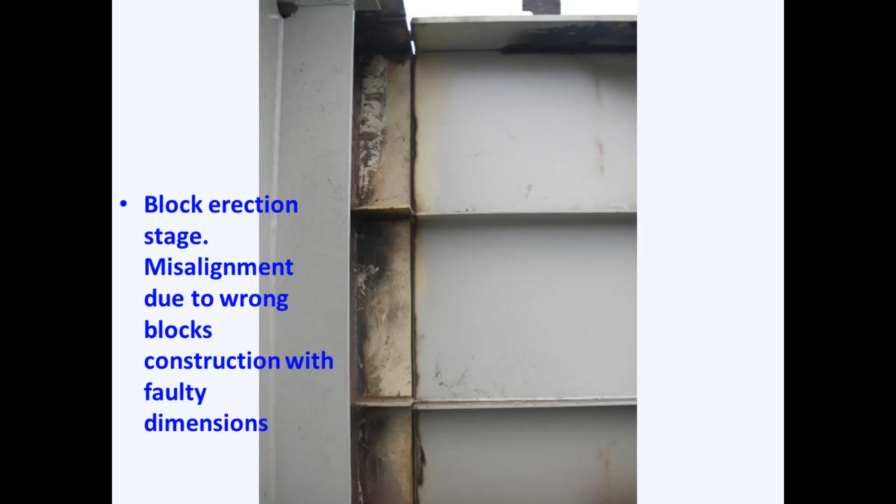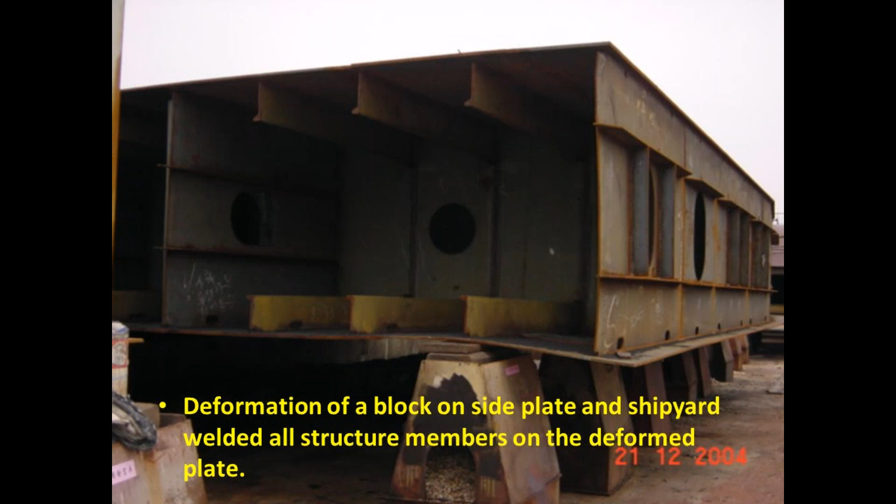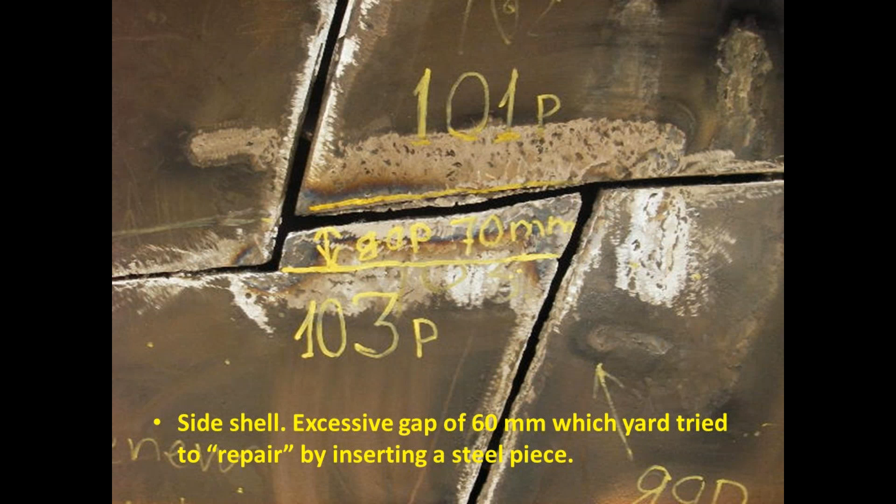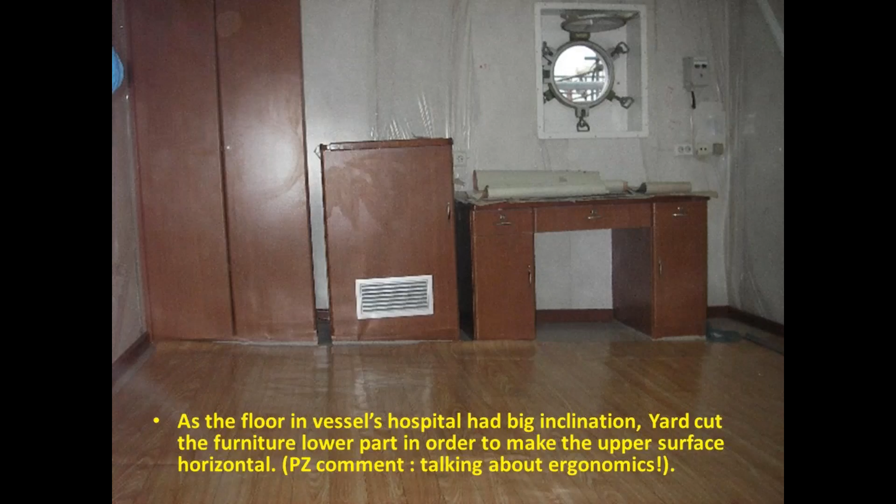And this is what I call ergonomics. Because of high inclination, this is how they weld. Yeah, they didn't fix the floor. That's fine.